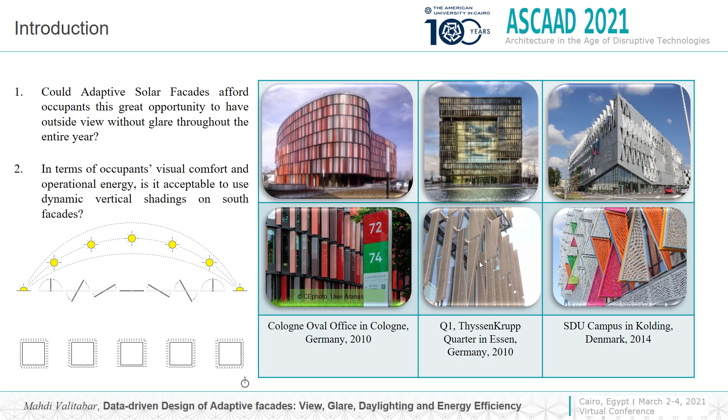Hi everyone, I'm Mahdi Valitabar, and in this presentation I'm going to talk about recent research in the field of adaptive facades. In the built projects, there are many dynamic vertical shadings which were utilized on south facades. It was surprising for me because we usually consider vertical shadings for east and west facades. Furthermore, the vast majority of adaptive facades usually restrict occupants' view connection to outside. These 2 points have inspired me to conduct this research.

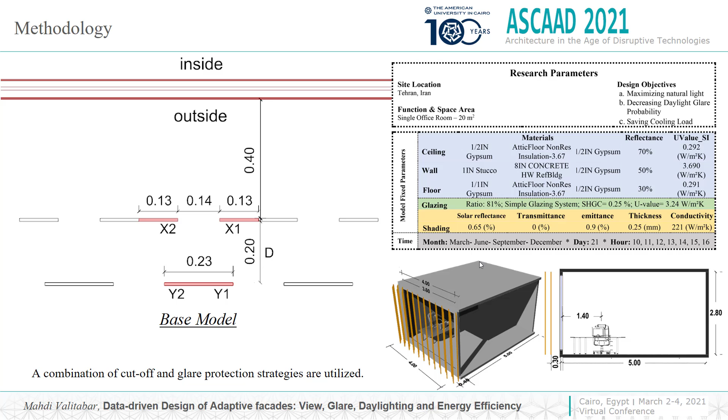On the left side, you can see the details of the base shading model which was utilized in this research. This is a multi-layer shading system which consists of 2 layers with a gap between them. The algorithm tries to change these dimensions in order to reach a balance between occupants' requirements and building energy criteria. Furthermore, a combination of cutoff and glare protection strategies were utilized to reach the research goals.

As you may know, there are some metrics in the literature review to evaluate outside view, including LEED view quality. According to the LEED standard, in 75% of occupied area, occupants must have a direct view to outside in order to get 1 point. Furthermore, based on ASHRAE, openness factor is the percentage of open or see-through the shading fabric. These two metrics could be considered as surface-centered metrics because they consider the whole space.

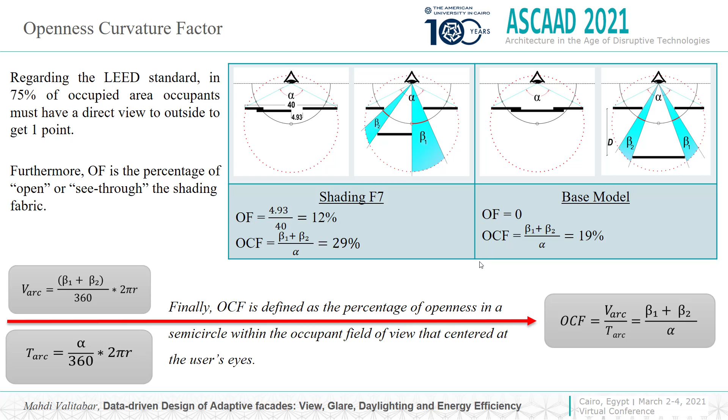But in our research, we need a metric whereby we could evaluate the quantity of view at a specific user position through a multiple layer shading system. Consequently, openness curvature factor was presented and developed based on openness factor. As you can see in this figure, for example, for the base model, we don't have openness factor, while openness curvature factor equals 19%. Finally, openness curvature factor is defined as the percentage of openness in a semicircle within the occupant's field of view that's centered at the user's eyes. This could be calculated through this formula. Ladybug tools and Octopus were used to do this research.

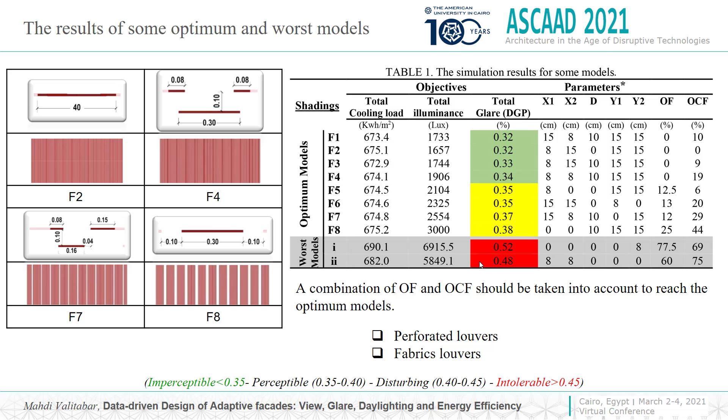The results of objectives for some optimum and worst models are illustrated in table 1, and you can see on the left side how the algorithm changes the size of some optimum models. Based on the simulation results, we concluded that a combination of openness factor and openness curvature factor should be taken into account to reach the optimum models. This is because the more the openness factor, the more the risk of discomfort glare through direct sun radiation. However, perforated and fabric louvers ought to be taken into account to reach a comprehensive method.

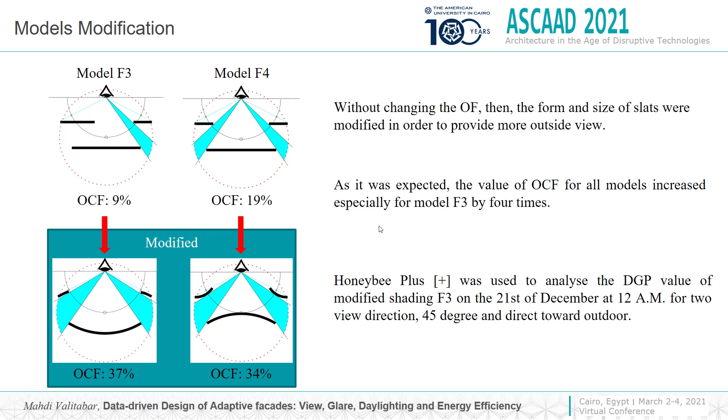In the next stage, without changing the openness factor, the form and size of some optimum models were modified with the objective of improving outside view. As expected, the value of openness curvature factor for all models increased, especially for model F3 by 4 times, as you can see here, model F3 and modified model F3. Finally, Honeybee Plus was used to analyze the DGP value of modified shading F3 on the 21st of December at 12 a.m. for 2 view directions, 45 degrees and directly toward outdoor, as an extreme time hour.

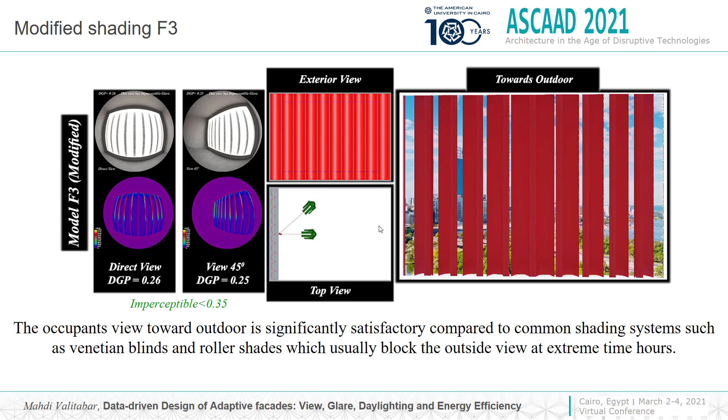The figure illustrates the ultimate outcome of this research. As you can see here, the generated models in this research could provide an acceptable amount of outside view compared to common shading systems, including Venetian blinds, roller shades, and also origami-based shading systems, which usually block the outside view at extreme time hours, while they could keep the amount of DGP in the imperceptible range, as you can see on the left side of the figure.

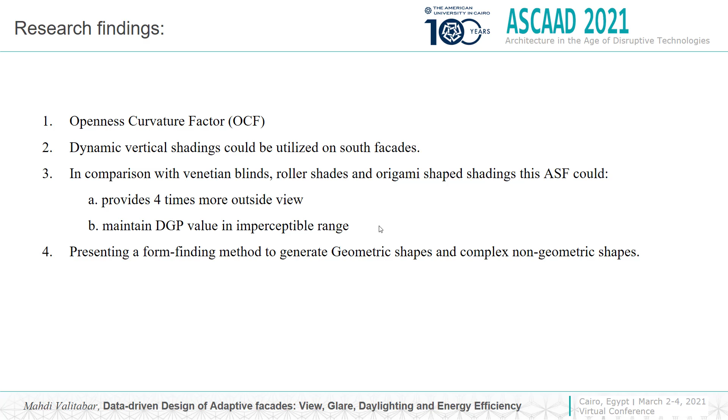Finally, the main research findings are presenting a new metric, openness curvature factor, a contribution to the knowledge of adaptive facades, and presenting a new method to design adaptive solar facades. And this method could be used through a form finding process in order to generate some optimum geometric or also complex non-geometric shapes, which could provide more outside view and keep the amount of DGP in the imperceptible range.